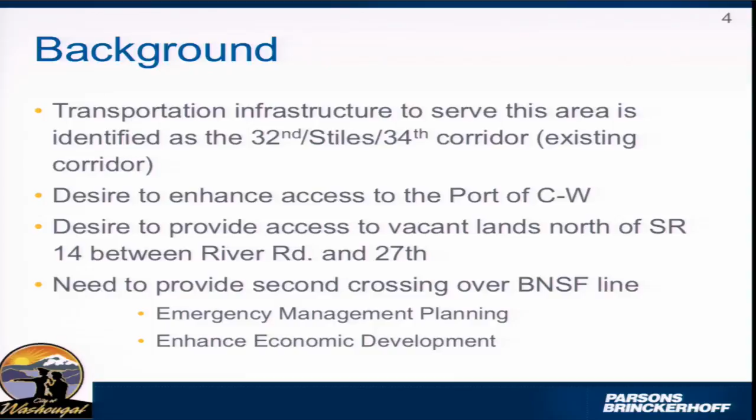It's all of that information that led to the development of a multifaceted transportation project, and it was envisioned to meet all of those goals - everything that I just mentioned. Improvements to the state route, and we'll get into that a little bit about what those were - those are not funded.

Improvements to local streets within the port - those are not funded as of yet. A second crossing over the BNSF line at 27th is partially funded, as you know, out of this legislative session through the gas tax. Improvements to Evergreen and 32nd, that intersection, that's funded, that project is underway. And then improvements to 32nd, Stiles, and the 34th corridor up to this urban growth area, that is unfunded.

That entire package of improvements is what we have been advocating for, your staff before my time, legislatively advocating for this entire package of improvements. There have been some iterations, but that's what we've been working on, and it's just in this past session where we got some traction and got some funding.

Unfortunately, it's not for the whole package, it's for one piece of it. Now, I should say we did get the funding for the intersection. That project's less than $2 million, I believe, and for reasons you can imagine, that one got funded a little more readily.

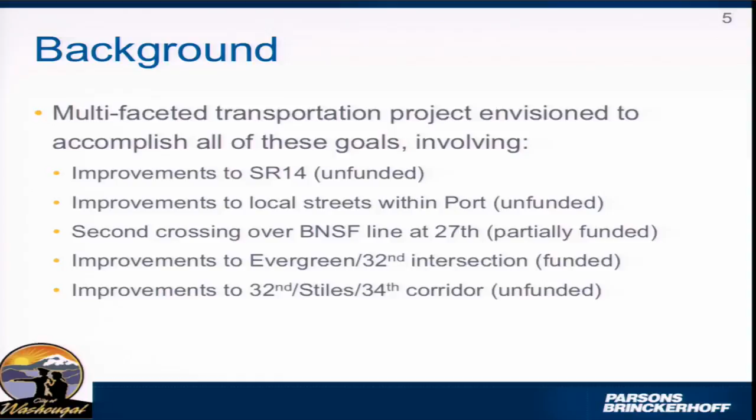So as we turn to 27th and look at the history of that, the idea of a crossing of the railroad at 27th, we found in our records dates back at least 30 years, and we'll show you some information about that. As I mentioned, it was included as a high priority project in Washougal's first Transportation Capital Facilities Plan. That was in 2005. And since that time, it's been included in all the subsequent iterations and subsets of that plan adopted by the council, including our transportation system plan.

Notably, it is included in the Regional Transportation Council's Metropolitan Transportation Plan. That makes it a project of regional significance and makes it eligible for various funding. And then before I leave this slide, to turn it over to Chris, I'll mention that it's included in a 2013 state rail plan as one of few improvements on the main line along the river.

I don't really have any details for that. Chris was just going to comment briefly on that. I looked into the state rail plan to get a sense of what the projected rail traffic was going to be on the line as it went through 32nd, mainly to make sure I had the most up-to-date information given some of the changes in unit train planning and so forth, and the train traffic volume increases. In doing so, I also reviewed the projects included statewide for rail improvements that range from safety enhancements to actual track improvements to improve capacity and so forth.

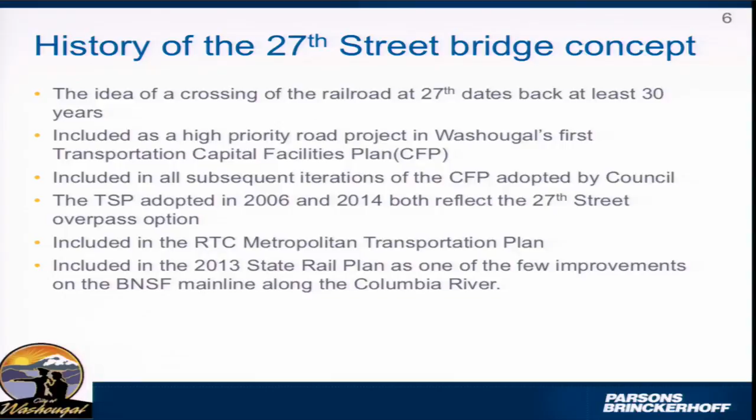Thank you, Chris. Quick question on one of the bullets there. In all the subsequent iterations of this plan, like you said, and since it has been a number one priority of the city, why wasn't the price of the bridge updated in those subsequent iterations? Why was it left -- this was touched upon a little bit in the 27th workshop, and Connie Jo questioned it a little bit. Why wasn't that price of $8 million updated, that initial $8 million?

It was, but it was updated after the project got traction a couple of sessions ago, maybe three sessions ago, and that number unfortunately stuck in spite of our advocacy that the number had been updated with a subsequent iteration, and that was an unfortunate timing thing that happened. So in some of our documents, we updated the monetary cost of the project, but it didn't get into the state's.

Well, we shared the information, but it didn't manifest itself in an appropriation of the full price of the project. It stayed at the number from a prior iteration of the transportation plan. So there wasn't an intent in the legislature, to the extent you can discern one, to basically fund half of the project? No, I don't believe so.

I think the chair of the Transportation Committee and the senior staff person have been very, very supportive, and we're very grateful for their support. Back at the time, we had documents in front of them that had a number from the currently adopted transportation plan, zeroed in on that. I remember the meeting where they did that, and that number got into their working documents -- I believe that's what happened at the Transportation Committee.

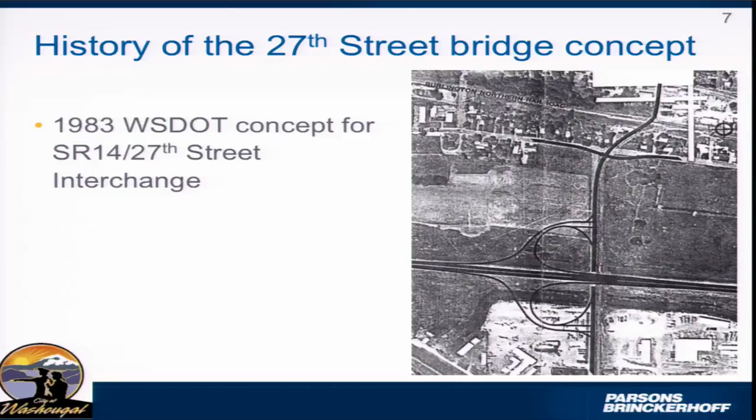At this time, just some narrative on this—we've communicated recently, just to refresh all our memories, because the team you have here wasn't part of the team in 2003 and 4 when this was being developed, and we weren't part of the team when this plan was adopted in 2005. We talked to the Public Works staff who were here at the time; they're still here regionally. We asked them why it was 27th, and not 32nd, for example, which is one of the crossings that's been noted. Basically the indication was that they did some review of the costs and impacts of doing a 32nd crossing, and they ruled it out—it didn't even come to the decision-making table of the council before 27th was presented.

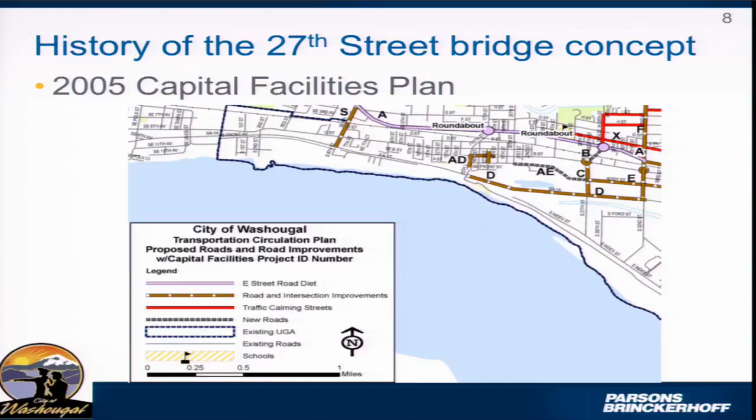I think the level of analysis you'll hear tonight was probably more than what was done in 2003 and 2004. But I think it's safe to say that when the city granted a land use entitlement to the shopping center at the northeast corner of 32nd and Evergreen, the Safeway Shopping Center, that entitlement was granted in the late 90s.

There was also a development agreement approved at the time. It only vested some things - it wasn't a significant development agreement, it vested trips. Is it 1988 or 1998? 98, 99 in that time frame.

When that decision was made by the city to approve the land use entitlement for the project and enter into that DA, in my mind, and we've chatted about this as a team, that's when the decision was made about where this crossing was going to take place between those two streets.

Whether or not that was really part of any deliberative process at the time, the implications of that project are such - and you'll see later what we've talked about - the implications, issues, and costs that arise, not exclusively but in part because of that shopping center being there, are why the 27th alternative has been the preferred alternative.

How hard would it be to get the minutes and record of the meeting with the council and/or planning commission or hearing examiner? I don't know if we were on a hearing examiner system yet at that point. From the late 90s? We have those. I'd be curious to see if it was even discussed. Yeah, we can try to take a peek and see what we have.

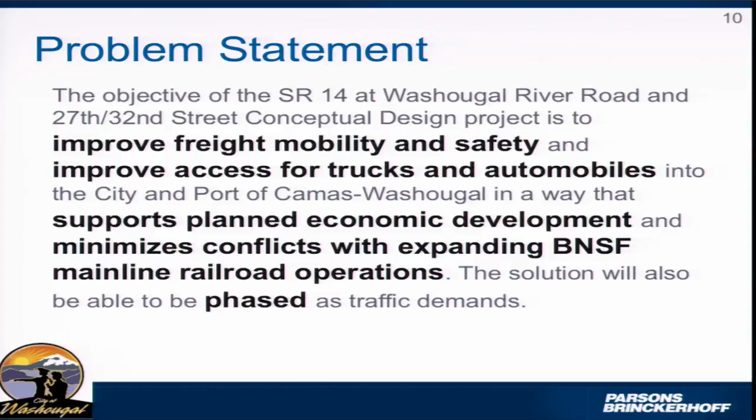Can I ask one quick question on one of your bullets on the previous slide? Do you recall why the roundabouts were removed as an unviable option? You said council - did they have any specific reason, and was there any engineering input from the city or the state regarding that removal and whether it was a viable option, or was it just a couple people on council who decided they didn't want roundabouts?

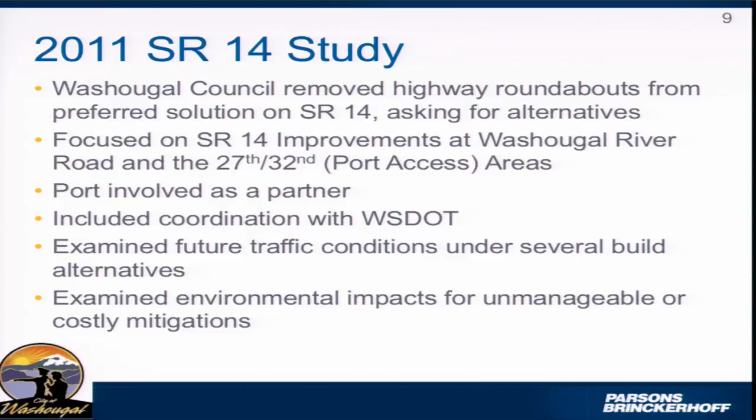I don't remember every detail of that. I might defer to your colleagues on the council who were here at the time, but at that point, in the moment of those conversations, we didn't engage engineering analysis beyond what had already been done in terms of the advocacy and viability of roundabouts on the state route. That had been done earlier, 5-6 years earlier. We didn't undertake additional analysis.

I think the majority of the council at the time, based on feedback maybe from constituents, their own sense of it and their own perceptions, felt that roundabouts on the state route would not be the preferred solution. That was really in the wake of - and this is getting at a time when I was just coming onto the city. These decisions were made just before I got here.

There were some roundabouts on the East Street project, I think at River, and maybe even another one. Those were value engineered out because of some cost concerns. One at River Road, yeah, the one at River Road.

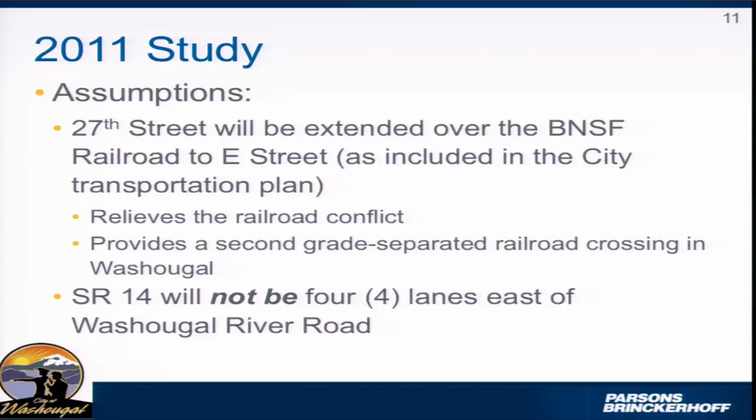When we looked at 27th, though, we didn't preclude other ideas. So our analysis on SR 14 wasn't dependent upon the 27th grade separation being in place. In fact, we kind of worked independent of that. And the results of our analysis actually ended up supporting a 27th Street grade separation, but it wasn't driven by the fact that it was already part of the capital facilities plan.

First, that if 32nd Street, when the traffic becomes heavy enough and it demonstrates a safety concern, their most likely first action would be to remove the left turn lanes off of the highway, creating a right in, right out type operation, similar to the outbound routing present at 32nd today, where you can only make a right turn onto the highway. And I've got some exhibits that will show that in just a few slides.

They also noted that an interchange at either 27th or 32nd violates their 1 mile interchange spacing, provided an interchange was provided at River Road, which was considered the higher of the priorities at the time. So we started with, well, we got to do something at River Road, and then what can be done with the port access at 27th and 32nd.

It was through collaborative workshops with WSDOT that we identified that an interchange at River Road could be coupled to ramps, or more like frontage road, to 27th, and by coupling it all together and not actually creating the highway access point at 27th, it wouldn't be in violation of their interchange spacing standards and would be permittable.

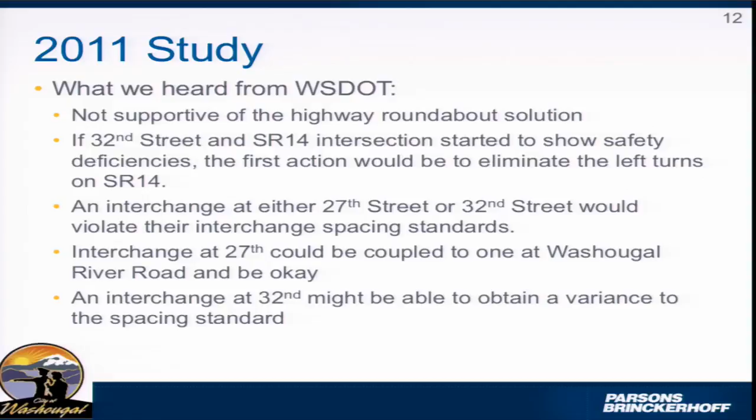I have a quick question for you. Now, WSDOT said that there will not be 4-lane improvements east of Washougal River Road. What was their reasoning for that? Not enough traffic to support widening to 4 lanes. At the time, and looking out to 2030 traffic volumes at the time of the analysis, which we're still using today to maintain apples to apples with the previous work, there was just not enough traffic demand to warrant going to 4 lanes.

You're going to go into more detail on this part about 27th being coupled to an interchange at Washougal River Road? Good, because I can't really picture that. Well, the next picture is the picture of it.

Oh good, so I'll try to explain this a little bit. I may jump out of my seat because it might help explain it a little more. I think I'm tall enough.

So this is what our Alternative 8 was at the time. This was our big build concept. If we got everything we might want in terms of port access and interchanges and so forth, this is what we recommended. It was kind of the Parsons-Brinckerhoff recommendation back to city staff and ultimately council at the time. This included an interchange at Washougal River Road.

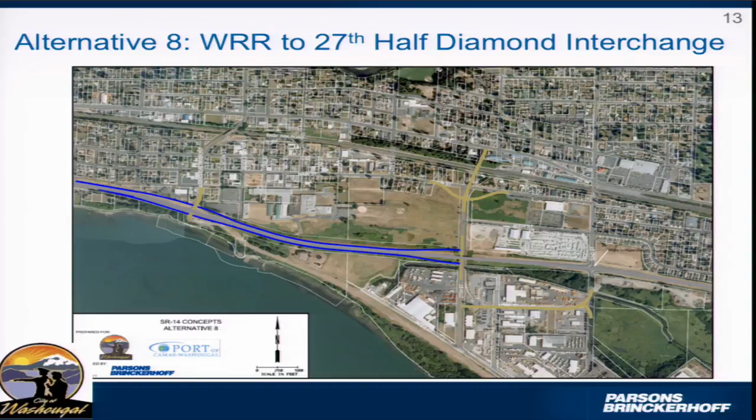And then what would happen is there would be access to SR14 for River Road traffic to get on and off, similar to any other interchange. But the ramp would also branch off into a one-way frontage road, although you could argue to make it two-way as well. That would drop down to 27th.

This takes advantage of the existing bridge at 27th to basically be part of the interchange, and could be done with a very minor additional cost to the River Road interchange work. We were thinking maybe an extra 10% over the top of a River Road interchange alone would actually build out to 27th.

Pretty straightforward street construction at that point. The other thing I might note while we're on here is we are showing some local improvements for the port area, the 27th crossing being one of them, which with this recommended alternative gains a little more strength for being where it is, because it becomes a connection point where the interchange would connect. We're also looking at a Ford Street connection to shorten some of the circuitous route around the port that you have to go through today for access to eastbound SR 14.

Do you have rough cost estimates for alternatives 8 and 6? Yes, I may have them later, but 6 is about $38 million, and 8 was 43, I believe. That's everything, I believe that was for the highway improvements; I think it excluded this crossing.

We're looking, I think 27th was what you have now, about $17 million, in line with what we were thinking back then. And I honestly can't remember what Ford Street was — about a little over $3 million, I recall. I think most of it is right-of-way, probably.

So let's move on to the next one. This is kind of our routing, our inbound circulation, and I'm showing two versions of this: one based on existing conditions as it sits on the street today, and one if WSDOT did happen to close the left turns at 32nd. What I'm focused on here is what would happen if, when the gates are down and the train is occupying 32nd, with a 27th Street grade separation, how much extra time might it take?

So we looked at this from a perspective that either Addy or Main Street could be used to relieve folks who are backing up behind a train. We cut down to 27th, cross over BNSF on the new grade separation, and then come back to the east and connect back to 32nd at Evergreen.

In the inbound direction, our travel time increase was remarkably small, just 20 seconds. That's because the series of right turns basically don't add that much time and keep traffic moving, versus say a 4-minute closure for a train.

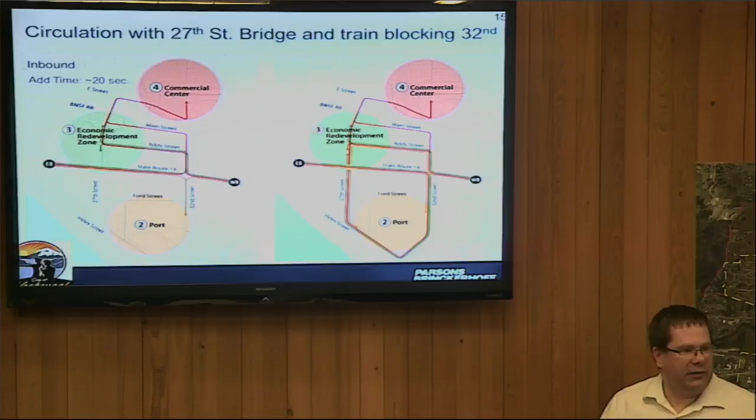With the left turns, when they get involved, in the outbound direction you're basically fighting left turns. The route around adds about 3 minutes of time, so that's basically fighting the left turn movements and everybody wanting to make that route around a train.

I will note that the 3 minutes is still less than the amount of time a train is likely to occupy the grade crossing. So if you arrived at 32nd and Evergreen and the gates were just dropping for a train, it would still be faster to use the 27th loop around.

And do you take into effect how many cars might be deviating because the train is there? Yes, we looked at it from a very high level. It's a fairly basic traffic analysis that we were able to conduct. There's opportunity to go in more depth and simulate in greater detail what the train might be doing and how cars will deviate, but we basically assumed anybody who was waiting and saw the train would divert. So we programmed it as 100% diversion. That may or may not be reality, but it gives us kind of a worst case scenario.

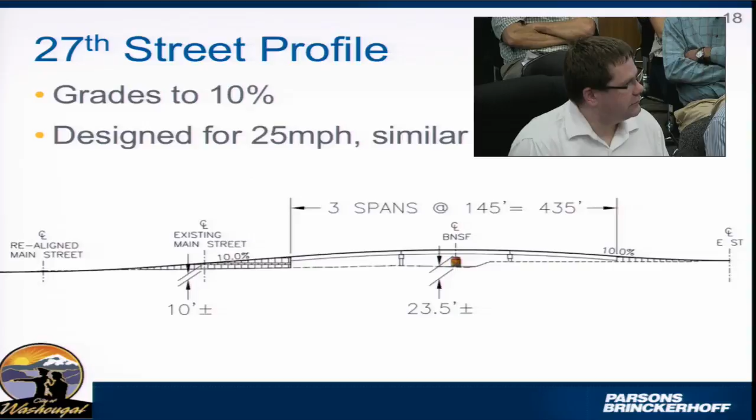If Burlington Northern decides to double track, would there be room on this bridge for that? Yes. We took that into consideration, as well as standard railroad clearances to the bridge piers, so they'd be okay for that, and we've got adequate vertical clearance to accommodate it as well.

Before you leave that, what's interesting to note — if you look toward the left, you see the center line of the realigned Main Street is the farthest to the left. That's where you start to take off to get your ramp. You need to be 10 feet above grade at the center line of the existing Main Street, and this is why you have to move Main Street south.

Correct. The reason is we've got the railroad spur running down into the port, which still needs an at-grade crossing of Main Street. Without that spur, we'd have more options and choices with regard to Main Street, but the spur itself basically ties our hands and dictates how far we have to move Main Street.

That's my exact question — I'm looking at Google Maps, but it's not showing the spur. Where is that compared to where we're looking right now? The railroad spur is this arcing line right here, and it parallels 27th Street all the way down underneath SR 14 and out to Index. In fact, I think you cross it again when you get onto Index.

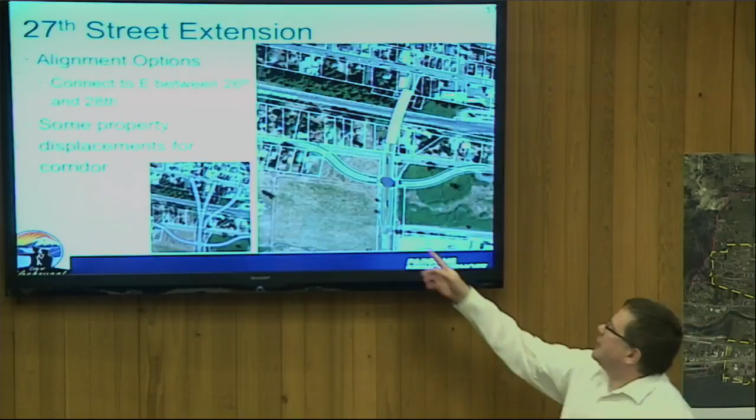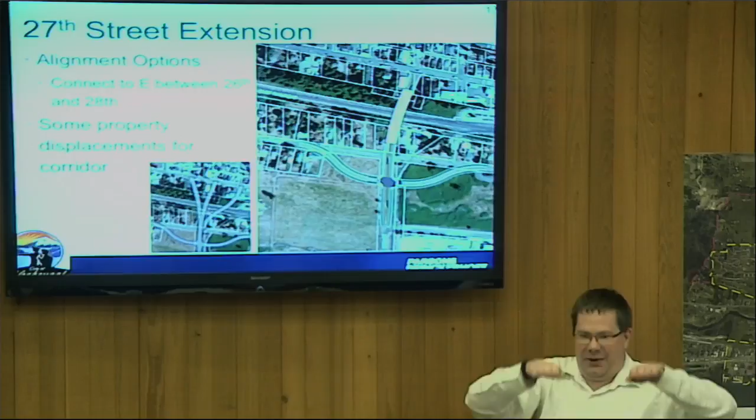When we were looking at this, sweeping away, we can't change the grade of the railroad spur. We can't make it go up and down. So we really have to match Main Street to the point on 27th where 27th and the railroad track are at the same level, and that's where Main Street comes across.

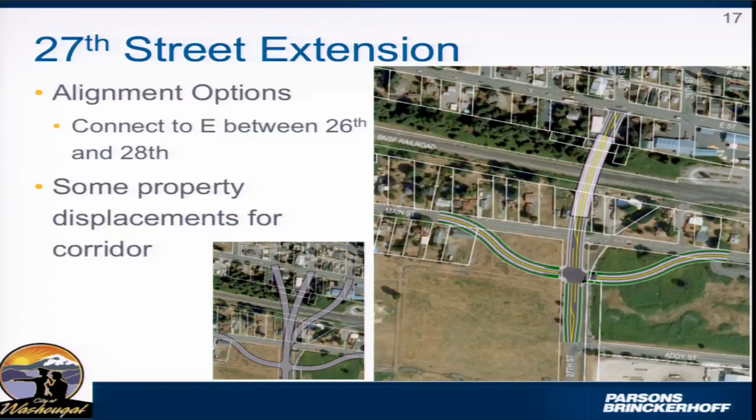So I just zoomed in, had a slide here that zoomed in on Main Street just to get a closer look at it.

This fully meets all city code requirements for street design without any variances. There are certainly things that can be explored through engineering to tighten things up. What I did want to note is that we took into consideration truck movements, hopefully infrequent on Main Street since it's more of a residential street, but for trucks using Main Street, they can make the turns, although careful consideration will be needed primarily on the southeast corner of the intersection, because there'll be crossing gate equipment on that corner that would need to be accommodated and might pinch off turns from the largest of trucks.

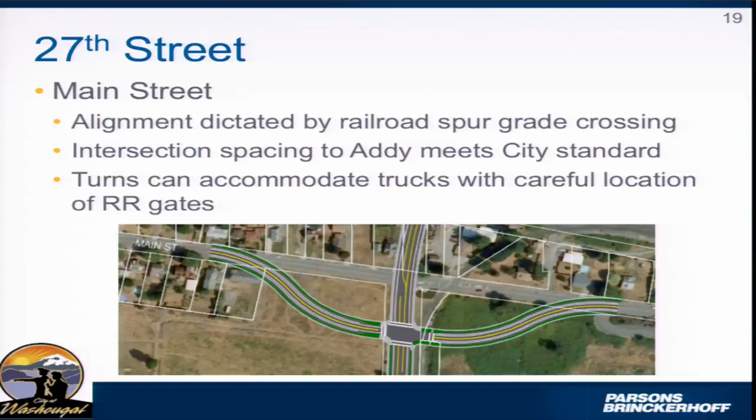So we took a similar run at 32nd, trying to take it up to a similar level of analysis. With our 2011 study, we really looked at what does 32nd look like from a basic profile. We didn't think too deeply about what might happen with Evergreen. We basically said, let's just raise Evergreen up. And what happens? Well, now you've got walls going all ways, and you're rebuilding a quarter mile of Evergreen up on walls. Everybody loses their access, and it was like, this isn't going to work for us.

Subsequently, there's been at least one other concept passed along that looked at a more thorough realignment of Evergreen, to align it with E Street and run it up through the commercial shopping center. That would carry some pretty substantial costs in right-of-way impacts and commercial displacements. It's still an option, although not one that I'm fully supportive of from my own engineering background, but that's personal opinion on my part.

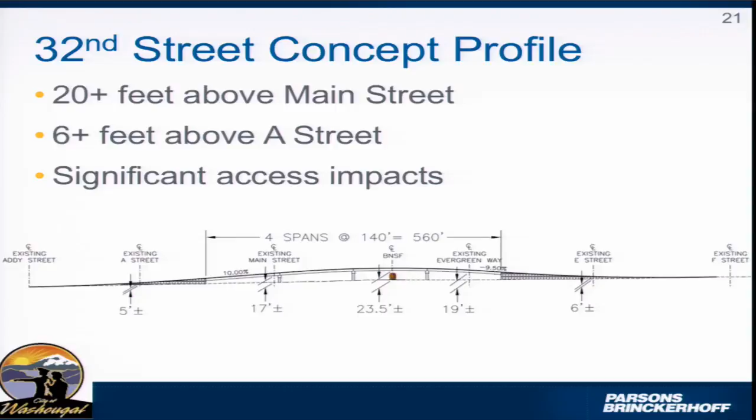Now all of a sudden the access is on F, and folks coming down 32nd—if we go back to the slide just prior—you're coming south on 32nd from all the neighborhoods up the hill, and you want to get into the shopping center. If you stay on 32nd, you can't get there. If you stay on it to cross, you can't get there. So you're going to make a left at F there, which it's not designed for, or use this jug handle.

Sneak off at 32nd on that little spur there that Chris was talking about, and then try to work your way on Evergreen back underneath and come up off of Evergreen, where a lot of folks go in right now. If you're coming up off the freeway and you need to get there, you can't, because you're way up in the air. You can't get to Evergreen. You'd come up and make your right on F, or you'd try to loop around on that jug handle. That same conversation would apply to businesses if we didn't have to

move those businesses as part of this project on the west side as well. Very impactful.

Is this a good time to talk about the constructability question and impacts of constructability? Yeah, I was going to hit it on the next slide, but why don't we talk about it here because it does have the visual.

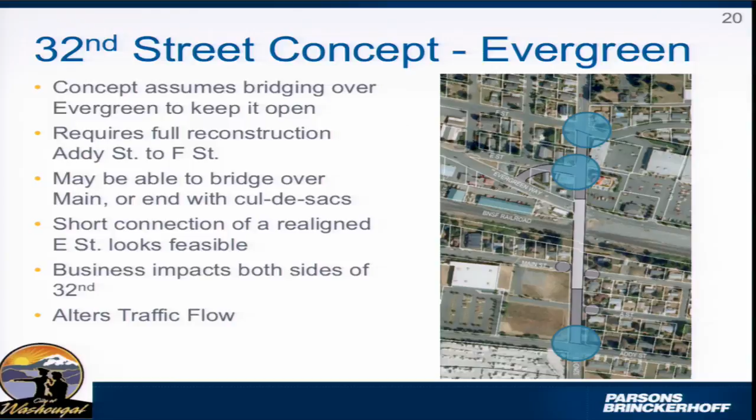The other thing we should be thinking of in terms of building 32nd on 32nd itself is the duration of time it takes to build a project like this. A project that goes up and over the top of the railroad, as shown here, is likely 9 to 12 months of construction. If we went underneath the railroad track instead, building a bridge for the railroad and ducking under, despite some technical challenges, because of the back and forth of work BNSF would need to do in terms of temporary track realignments, you're probably looking at a 2-year construction window, during which 32nd would be closed, short of acquiring property to temporarily realign it. That's something to consider and keep in mind.

To touch briefly on costs, we did some estimating back in 2011, and more recent work basically supports what we did, so I'm behind it. We're looking at a 27th Street bridge on the order of $17 million, all inclusive of engineering, administration, and construction. The 32nd project ranges anywhere from $32 million, which is probably similar to the concept shown tonight, up to $50 million, which would involve realigning Evergreen, buying all the commercial property, and setting it up for redevelopment.

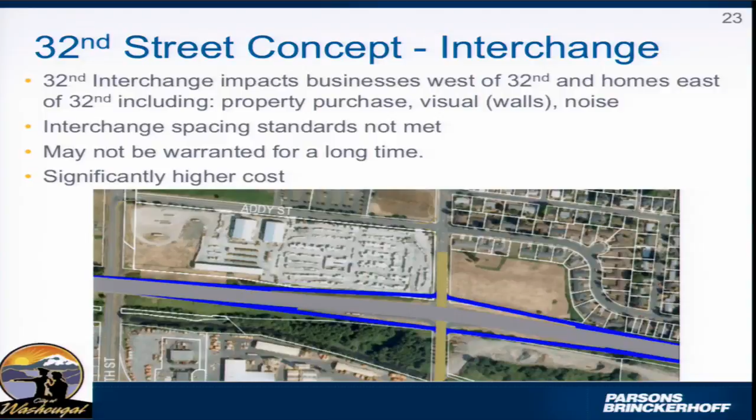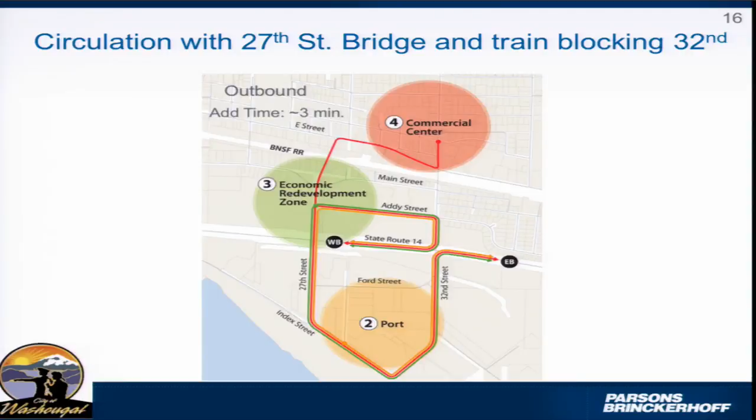Just wait for this one. That's your outbound. Inbound? Yeah, so do the best I can. 27th, there's your crossing.

When the state route is completed, we can make an assumption that we're here with a vehicle. Now there's an interim, and I'll talk about that. You go up, you go over, you come down, and you make a left and go up. And that's the timing that they modeled. That doesn't strike me as ideal.

No, notwithstanding all the other impacts, it would be more ideal to go straight up. That's 39th. That's 32nd. But that's at least twice as expensive and dramatically impacts existing commercial development to either side of it. But it's feasible. It could be done.

This is an analysis to look at what the implications are. So it doesn't mean you can't do it. You can do it. It also has all of those implications and impacts that Chris was describing to the neighborhood there. It cuts off the access on the west side of that neighborhood.

Is there anything that could be done to avoid Evergreen and just have it cut through directly and connect with 32nd, or would that just be too much? From 39th? From 27th? I think it's kind of shown on that sketch that Chris had up earlier, the WSDOT sketch, but there's significant residential impacts to snake that road up in a more direct route to 32nd Street.

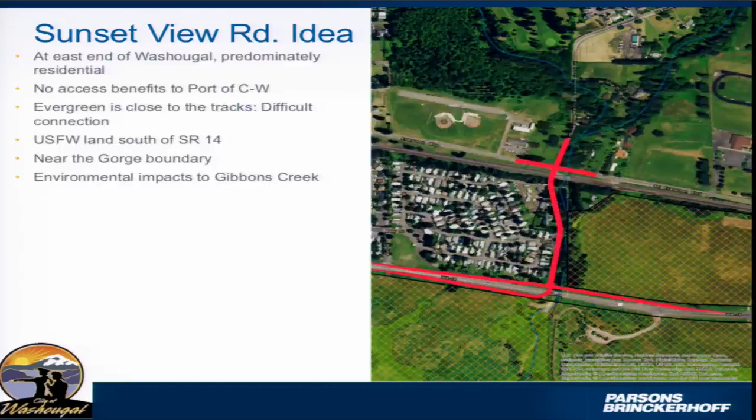And if you went back just two more really quick, could you talk, Chris, about even where you have the red lines that show? One of the challenges here is how does the new 39th that was elevated across the tracks...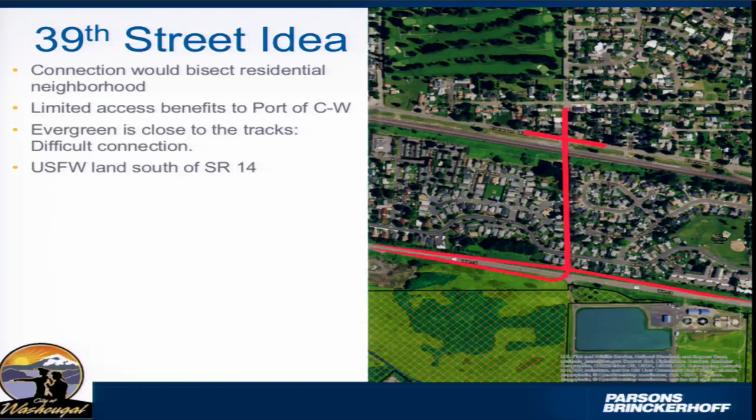How would you get from that to Evergreen if you could at all? We decided not to show it, but you were verbalizing loops and ramps. In this case, the red line you see running east and west onto Evergreen is about 400 or 500 feet of length in terms of what you're seeing there.

That's about what I calculated it would take in terms of street, either raising it or lowering it to bring it up and meet a crossing with the BNSF.

Similarly kind of running up 39th to complete that connection. So you can imagine with dramatic grade changes, let's say the Evergreen intersection out there being lowered, let's call it 20 feet.

What that means in terms of the access to all of those existing homes that abut 39th, face 39th, and then face Evergreen out there, it would be, in some cases, probably insurmountable changes to their access that would dictate some acquisitions and displacements. Not that some of that land couldn't be repurposed for storm drainage and that kind of thing, but in general, it's something we hope to avoid on projects like this.

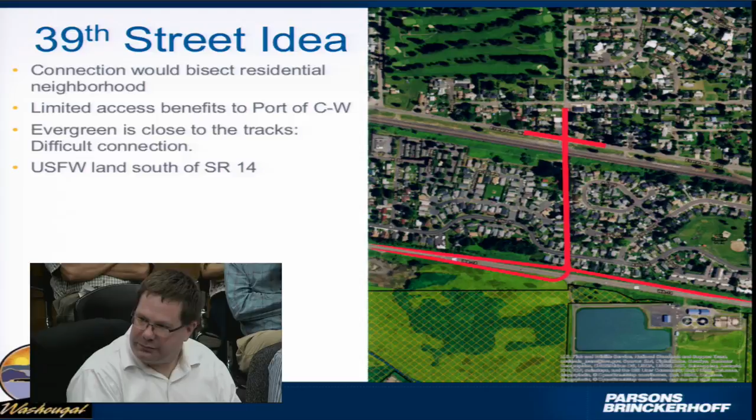And when we chatted, Chris, even though you didn't cost this out, the scope of work that we were affording with this particular iteration didn't accommodate that. I recall your comment to us as a team was at this level of analysis, you wouldn't recommend to us having you do any further work on this one or the other one because...

Conceptually, this one looks like, to me, and if I had to ballpark it, it looked like combining a couple things. I mean, it looked like a $60 million project to do what's the red line work on here, just ballparking with all the right-of-way and so forth.

So this looked like, and the other one, and Sunset Views similarly, they look like $60 million projects, just ballpark. And that would just be at the back of the state route envelope for Sunset. Then you have to add in whatever it would take to... that ignores the connection up across the ravine and so forth, which might be structure and bridges in and of itself, which looks also pretty expensive, just the way it's been described.